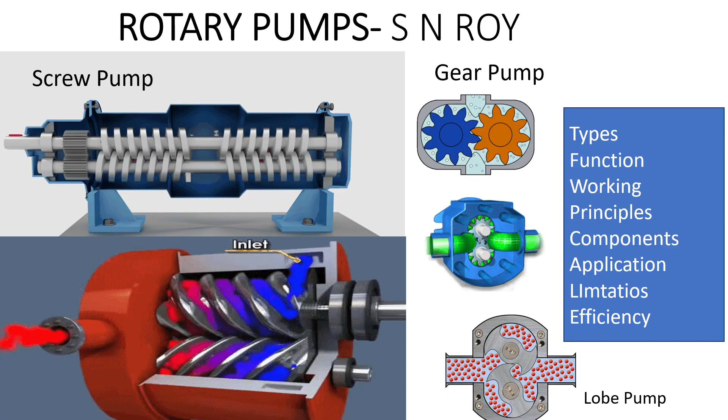Basic rotary pump action is the movement of displacement volume from the suction to the discharge. That is the first advantage. Second, it eliminates valves. There is no valve, so flow is constant.

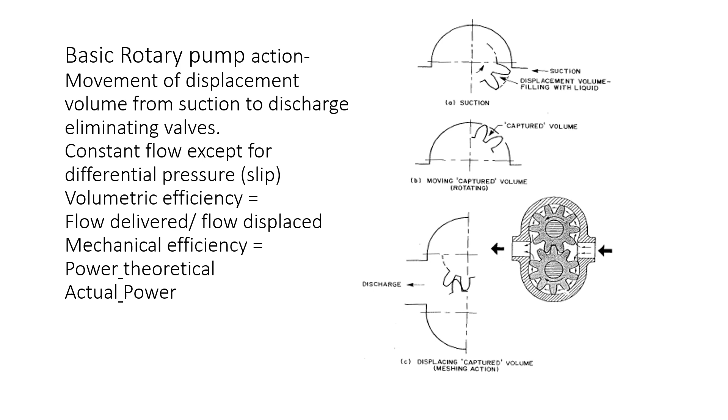Flow is constant except for differential pressure, that is the slip. Slip is actually the liquid which passes between the screw or gear and the casing back to the suction. Volumetric efficiency is equal to whatever flow is delivered divided by whatever flow is actually displaced by the pump, and the mechanical efficiency of the pump is equal to theoretical power divided by the actual power.

First, we will discuss the external gear pump. External gear pumps are used where the teeth come in contact at the mesh. As the teeth come out of the mesh, liquid flows into the pump and is carried between the teeth and the casing to discharge it outside.

Here you can see the liquid entering from the bottom, and though both gears are rotating in opposite directions, the liquid within this gap is pushed back and then it goes out.

This is an external gear pump, and all these are forms of external gear pump. The teeth come back into the mesh and the liquid is forced outside. It is meshing, then the liquid is forced out towards the discharge port.

External gear pumps rotate two identical gears against each other. Both gears are on a shaft with bearings on either side of the gears, as well as shaft seals.

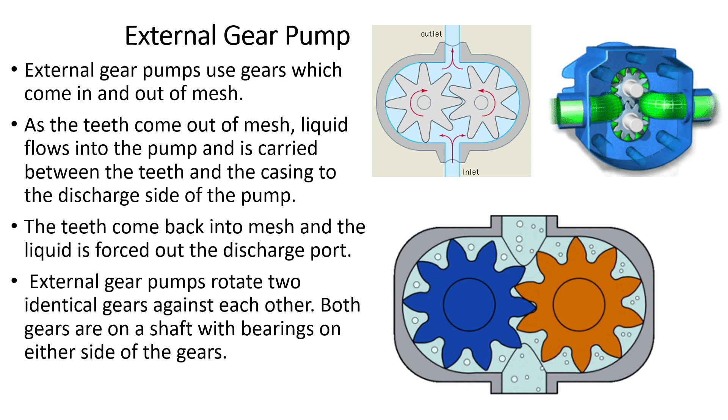Let us see how the external gear pump works. External gear pump uses two identical gears rotating against each other. One gear is driven by a motor and in turn it rotates the other gear due to the meshing. Each gear is supported by a shaft with a bearing on both sides of the gear.

As the gear comes out of the mesh, they create an expanding volume on the inlet side of the pump. Liquid flows into the cavity and is trapped by the gear teeth as they rotate. Liquid travels around the interior of the casing in the pockets between the teeth and the casing. It does not pass between the gears.

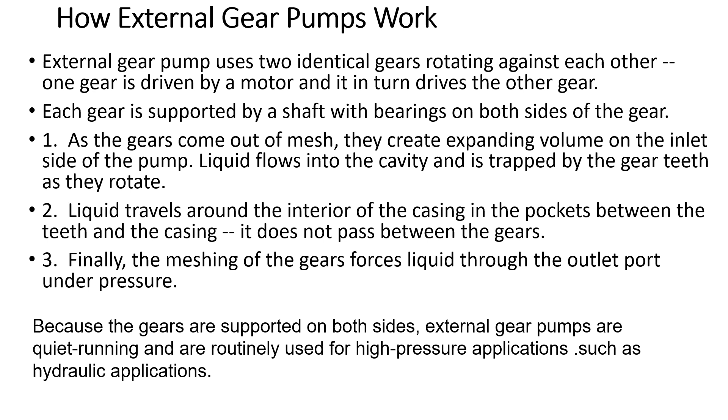Finally, the meshing of the gear forces liquid through the outlet port under pressure. Because the gears are supported on both sides, external gear pumps run quietly and are routinely used for high pressure applications such as hydraulic applications.

Here we are able to see two different drawings of the external gear. Let us talk first about the components. This is the driving shaft. Here is the seal; there will be a seal on this side as well as on this side also.

This gear, which is the driver gear, is mounted on this shaft, and the driven gear is mounted on this smaller shaft. They are put inside the casing. These are the bearings, bushing 1, 2, 3, 4. And then they are totally boxed up inside.

When we are using this type of gear pump, we can use only liquids which don't contain anything abrasive, like we can use for lube oil and other things.

On the bottom side drawing, the basic difference is that this is the driven shaft, this is the driving shaft, and this is the shaft which is being driven by the driven shaft, but there are seals. You can see there are seals provided immediately after the part and before the bearing. The seals are inside the housing and the bearings are outside the housing.

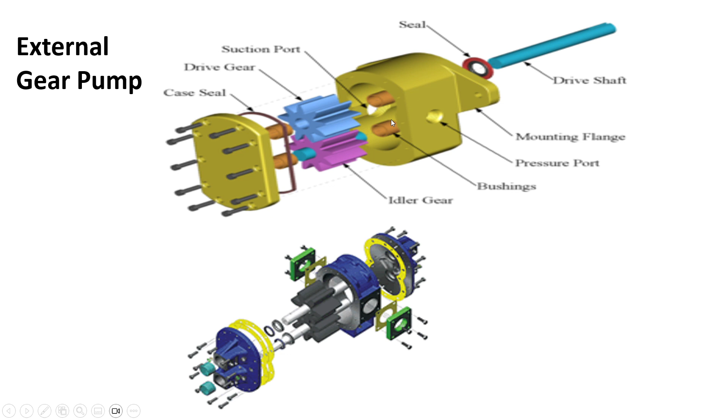Let us see the advantages of the external gear pump. It can run at higher speed than any type of rotary pump. It gives you medium pressure. There is no overhung bearing load on this. It is relatively quiet and can be used for a wide variety of materials.

Disadvantages are that if you are using a pump where the bushings are in the liquid, we need 4 stuffing boxes, and because the gear is driving the gear, no solid is allowed in this pump.

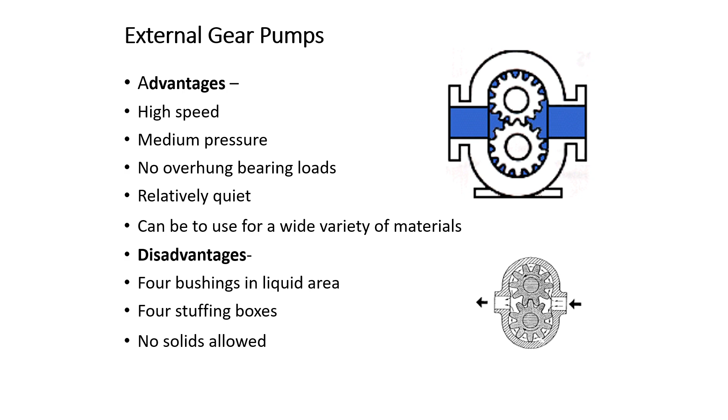Now let us talk about another type, the internal gear pump. An internal gear pump is a type of positive displacement pump that consists of 2 gears. One gear is called the outer gear, which is a rotor, and the other is the inner gear, called the idler. The gears mesh together and rotate in the same direction within a pump casing, creating a sealed chamber between the teeth of the gears and the pump casing.

The sealed chamber moves the fluid from the pump inlet to the pump outlet. A crescent doesn't allow the liquid to flow from the discharge side to the suction side.

Let us see the right hand side top animation. You can see liquid is coming from here. This is the driver gear, this is the driven gear, and there is a gap between the two gears, where the crescent is provided so that there is no backflow of liquid from this gap.

This is the internal relief valve provided for safety of the pump from excessive pressure. On the bottom drawing we can see this is the suction inlet.

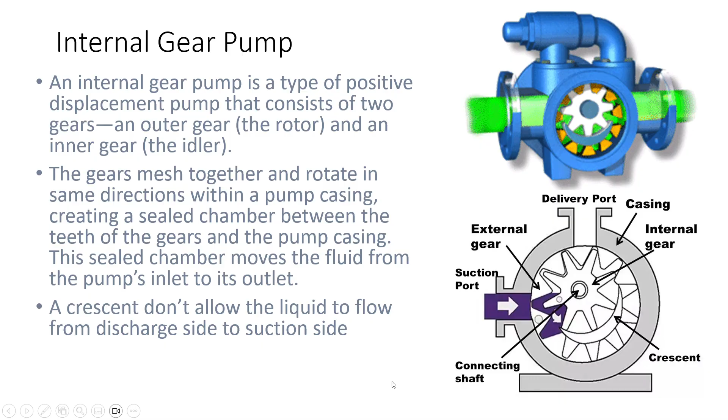Internal gear pumps are versatile, being capable of operating across a wide range of fluid viscosities and temperatures. They are preferred to the external gear design in applications involving higher viscosity fluids at high temperatures and with fluids containing solids. Typically, internal gear design operates at lower rotational speed than external gear design, has greater clearances, and is therefore less susceptible to wear in these applications. For the same reason, internal gear pumps are also better suited for pumping liquids which are shear sensitive.

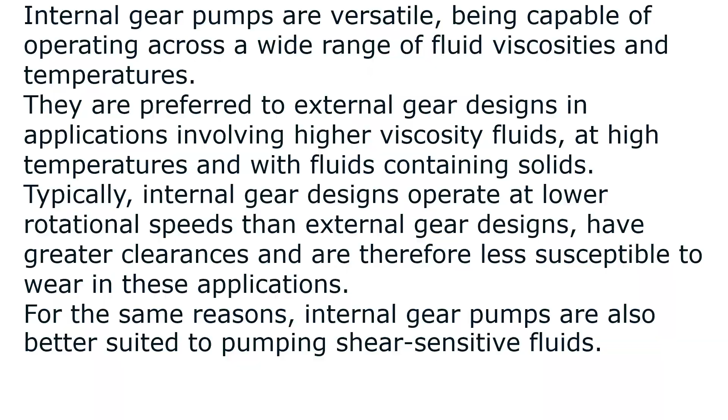Now let us talk about a screw pump. A screw pump is a device that employs one or more screws to transfer fluid along the axis of the screw. To pressurize the fluid and transport it inside the system, these screws are interlocked together, mostly through a timing gear.

A screw pump is made of many components including a case, a screw, which may range from 1 to 5 screws depending upon the kind of screw pump, bearings, seals on both sides, motor coupling, and a driving shaft. Screw pumps have a straightforward design for axial movement of the material.

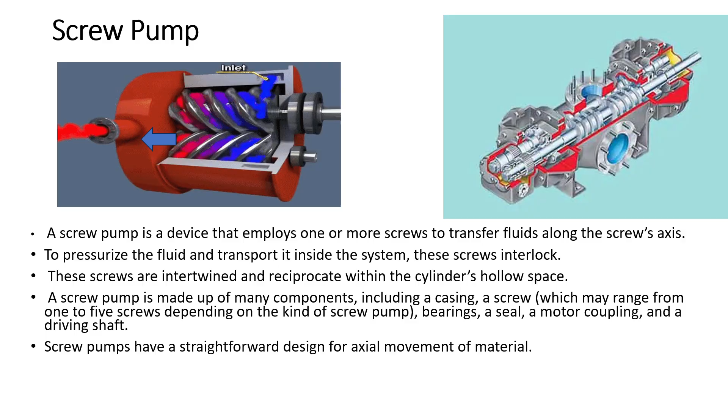So here we can see a few drawings of screw pumps. All these are showing double screw pumps. On the right hand side, we are able to see a screw pump which is unidirectional. This means the liquid is entering from the port on the left hand side and getting discharged on the right hand side, and the two shafts are rotating opposite to each other. Timing gears are here, bearings are here, seals are here.

On the left hand side top, we are able to see a double flow screw pump. In this case, the liquid is entering from this side also, and from this side also, and the liquid is flowing here from left to right, here also from left to right, here from right to left, here from right to left, and then coming out from here.

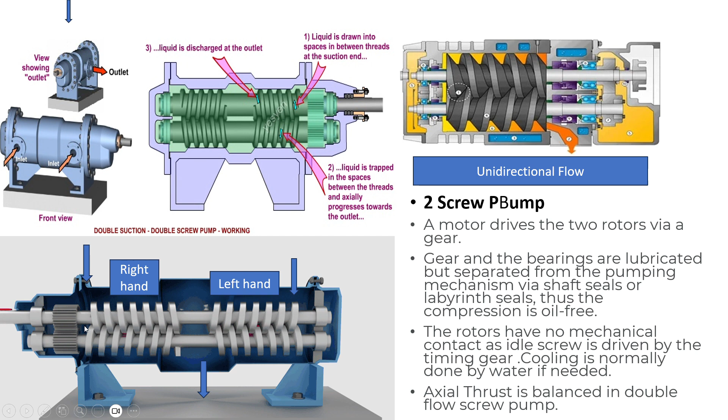So we can see everything in this bottom animation. This is a right hand thread. This is moving in this direction, moving liquid in this direction; from this side liquid is moving in this direction, and then the liquid is going out. These are the bearings, these are the bearings, these are the timing gears, and seals are provided here at this point.

We can see in this drawing a bit more detail. If we look at the top side, this is the end cover, this is the screw, this is the timing gear, these are the bearings, this is the casing, these are also the bearings, and then the cover plate, and then the end cover.

Here we call this the female gear, meaning it is the driven gear, and this is the male rotor, meaning the driver gear. We can see a bit more detail on the bottom right hand side also.

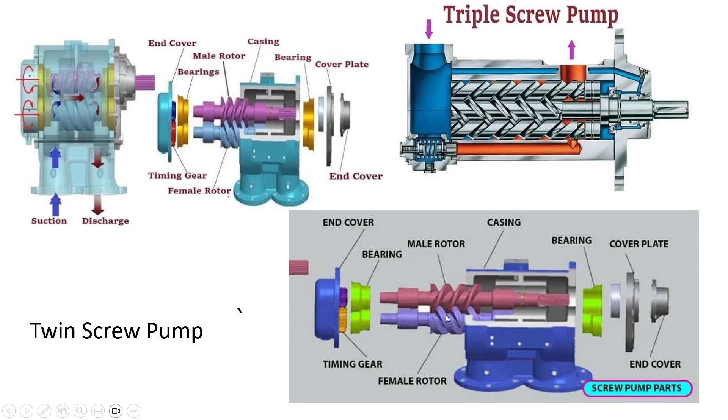You see, this is the end cover, this is the bearing, this is the timing gear, seals are coming here. This is the male, the driver gear, this is our male rotor, and this is the female rotor. On this side also we have got the seals, the bearings, and then the end covers.

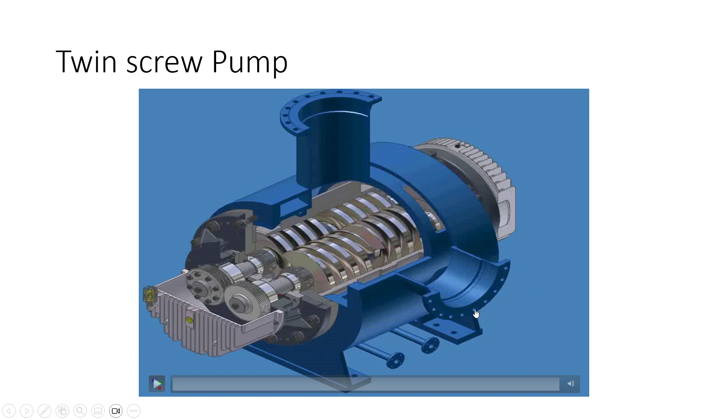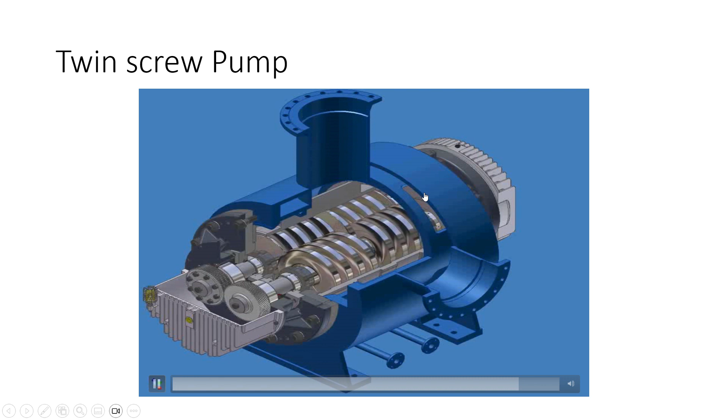Let us see how the pump is rotating. Liquid is flowing from this side to this side to this side, and here from this side to this side liquid is coming in. Here is the timing gear, these are the seals, and these are the bearings. Similarly, seals and bearings are on the other side of the pump also.

Let us see the applications: pumping oil, grease, processing food, drying food, packaging, and even freeze dryers tend to use oil-free screw pumps to avoid contamination of pump oil by water or debris from the process. Shaft seals are used between the bearings and the screw housing to avoid leakage through the shaft.

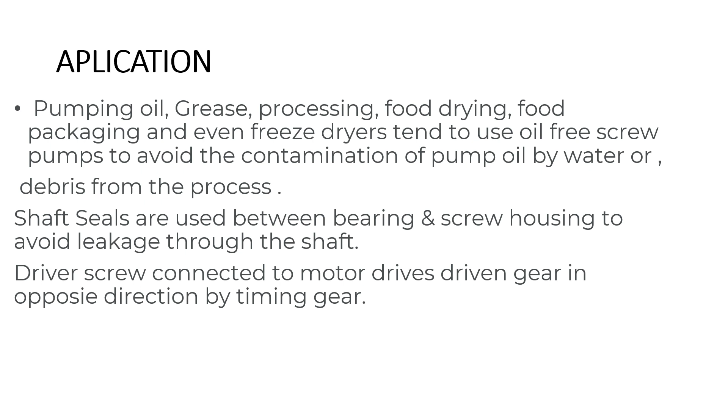The driver screw, connected to the motor, drives the driven gear in the opposite direction through the timing gear.

These pumps are the best choice for transfer of liquids requiring a smooth and non-pulsating flow. They have high suction ability, and cater to a number of industries including shipping, chemicals, ceramic, paper, waste paper, paint, oil and gas, and many more. They can effectively handle the transfer of abrasive and non-abrasive liquids with and without solid particles, such as sewage, sludge, bilge, and food such as jelly, yeast and ketchup, even concrete mixture.

Also, single screw pumps are non-clogging and reversible. They work on the principle of positive displacement, and comprise a single helix metallic rotor and a double helix stator.

The liquid enters through the suction port. As the rotor moves inside the stator, cavities are formed. The liquid moves along the cavities due to positive displacement and gets discharged from the discharge port of the pump.

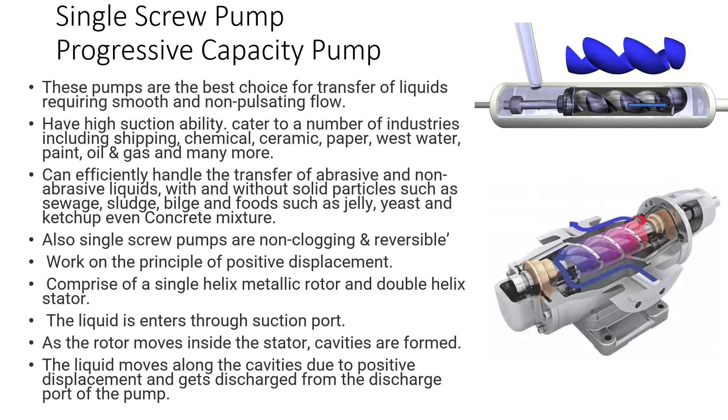Now we shall be discussing the rotary lobe pumps. Rotary lobe pumps are also a positive displacement type of pump that use two or more lobes rotating around parallel shafts in the pump body to move the liquid.

They are widely used in hygienic processing industries, including food and beverage processing and biopharmaceutical manufacturing. Unlike gear pumps, the lobes used in these pumps do not make physical contact with each other, a feature that provides distinct advantages in pumping certain types of materials.

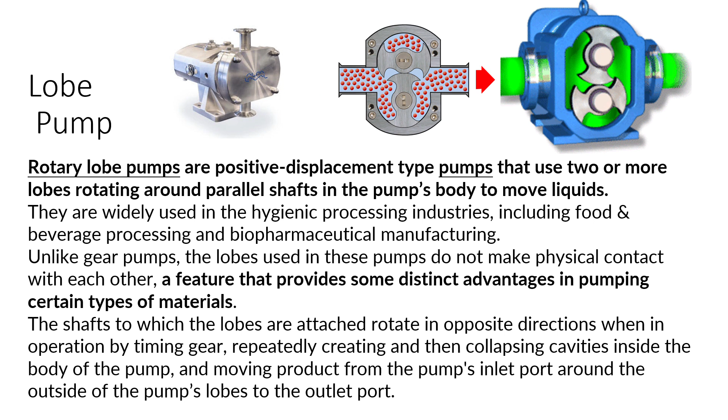The shafts to which the lobes are attached rotate in opposite directions because they are connected through the timing gear, repeatedly creating and then collapsing cavities inside the body of the pump and moving product from the pump inlet port around to the outlet side of the pump.

Let us see the advantages of rotary lobe pumps. Since the lobes do not come in contact with each other, lobe pumps can move solids suspended in slurries, such as cherries or olives in food processing applications, without product damage. The gentle pump action further minimizes product degradation. It can handle larger size particles than may be pumped with other types of positive displacement pumps.

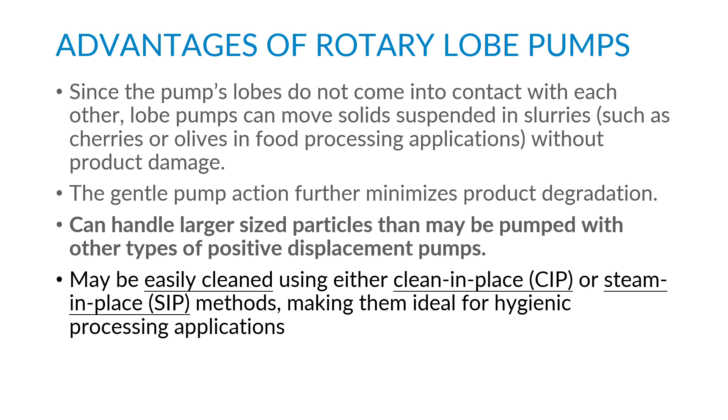They may be easily cleaned using either clean-in-place or steam-in-place methods, making them ideal for hygienic processing applications.